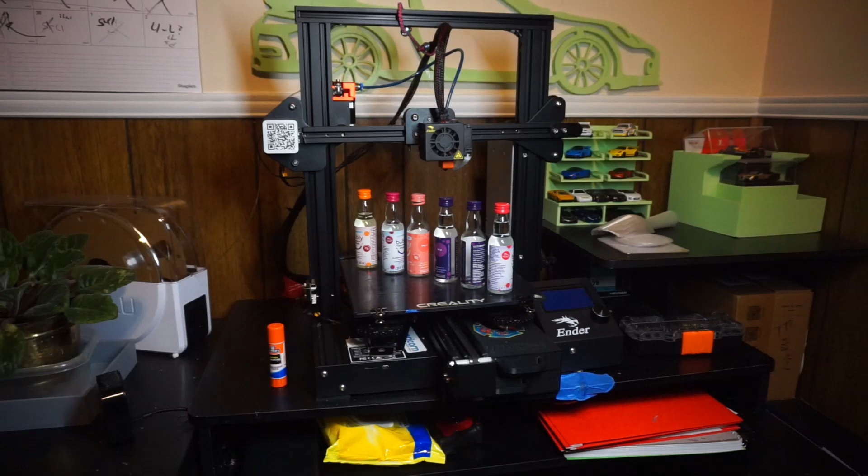Today I will be teaching you how to 3D print. I currently have these bubbly flavorings in my fridge and I'm afraid they'll leak. So I'm going to solve that problem with my 3D printer and I'm going to bring you along with me. I think they can go right here in my fridge.

It should be good. Now this is an Ender 3 Pro I got for Christmas. I have used filaments like PLA and PETG, and today I'm going to use PETG by a company named Overture. As you can see, it's transparent, so it has no color, it's just clear. And in order to keep the filament printing well and clear, we're going to use this filament dryer. Once turned on, it heats the filament up and allows it to release moisture.

While the filament is drying, let's draw up an idea. I want the bottle standing up in an arrangement sort of like this. Let's draw the first part. This will be the base, and the top will slide into the top of this base, so that's the side view on the left, and the top view on the right. As drawn here, I originally thought there would need to be indentations in the base, but later I discovered that wasn't actually necessary. And let's draw the second part too.

This part will sit above the base and will actually stop the bottles from falling over. The bottles will slide into this top part and sit on the base. I'm just going to draw the bottles in really quick just to kind of show what it would look like with the bottles in it. And now that we're done with the idea, let's get some measurements. Just for clarity, I'm going to draw the bottle out. That way I can put the measurements right next to it.

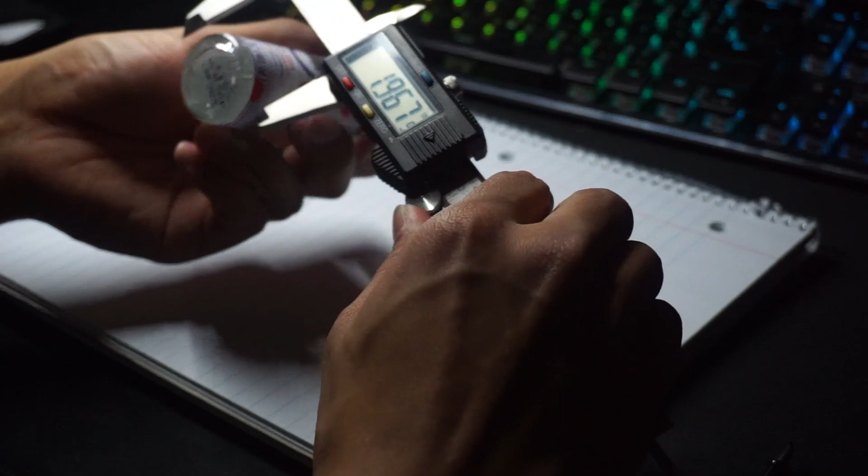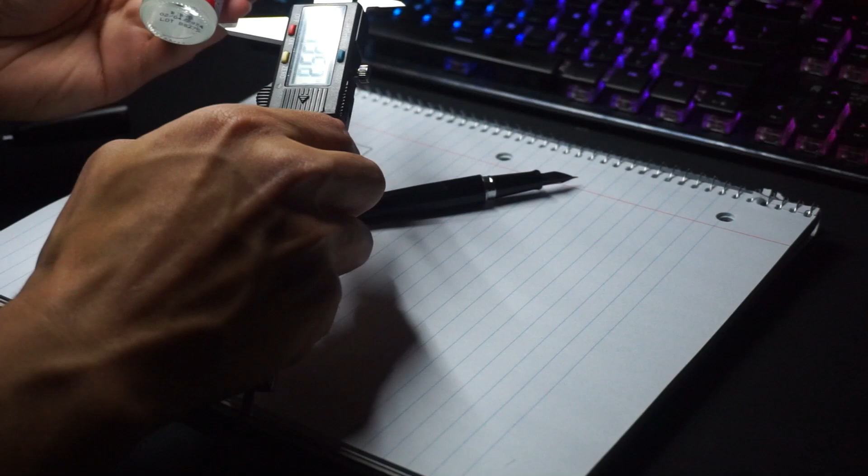First I'll measure the width of the bottle. This will help me determine how wide the holes need to be and how long the whole part needs to be. It will also help me determine how many bottles I can actually fit in the part. As we can see, I got 1.237 inches. Take that with a grain of salt. Next, I'm eyeing up how tall I want the part to be. 2 inches should be enough, hopefully. A tall part would take up too much plastic anyway.

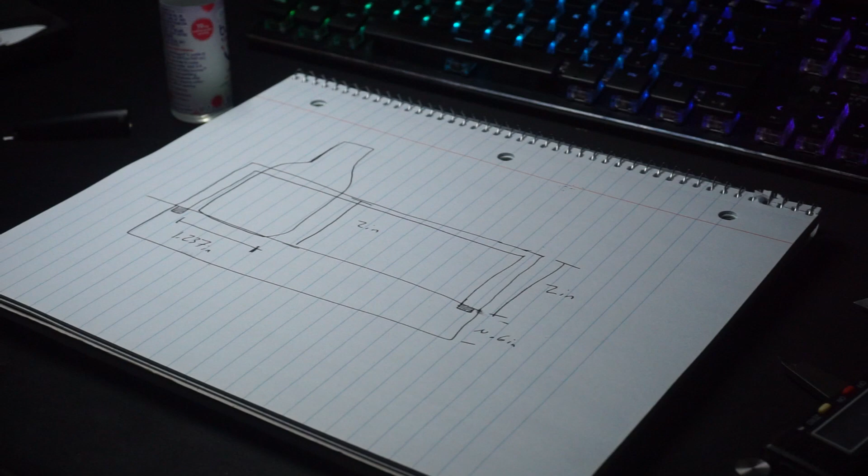Just gonna draw in the base and then draw up the top part. So the base will be one part, the top will be another that slides into the bottom. So here's a basic side view of the part with one bottle. The proportions are garbage. Here's a top and side view of the bottom part, and now we can determine the length of the part. Let's say 3 bottles should go in this part. And there's a 0.5 inch space between each bottle and a 0.5 inch space between the walls on each side of each end bottle. I will also draw a side and top view of the upper portion of this part, which will hold the bottles upright.

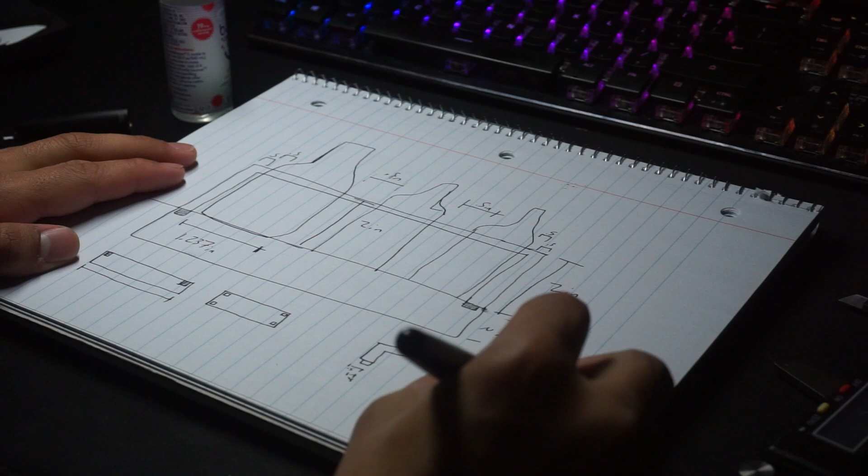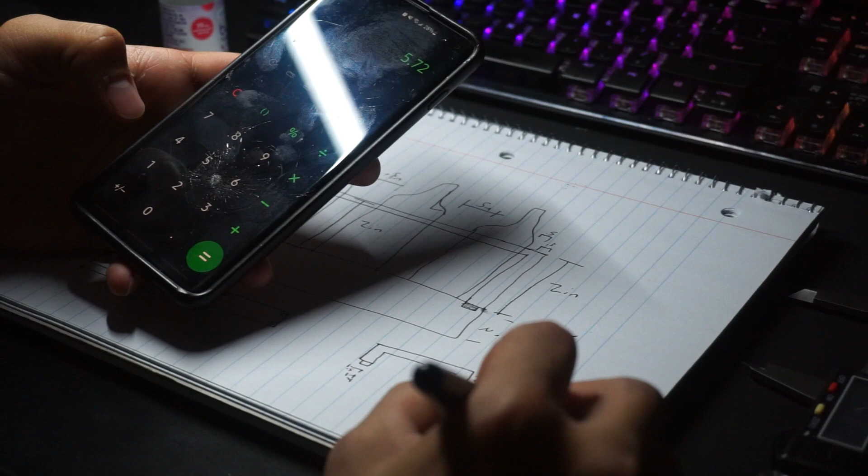After using the calculator on my phone to add up the space in between the bottles and the width of the bottle, we get 5.72 inches as the total length of the part, if it holds 3 bottles. Now that we have some measurements, I'll sign off the drawing and let's get to designing on the computer. I learned computer-aided design on Inventor, but I mostly use SolidWorks now. So after creating a new part and naming the file, I will get to designing.

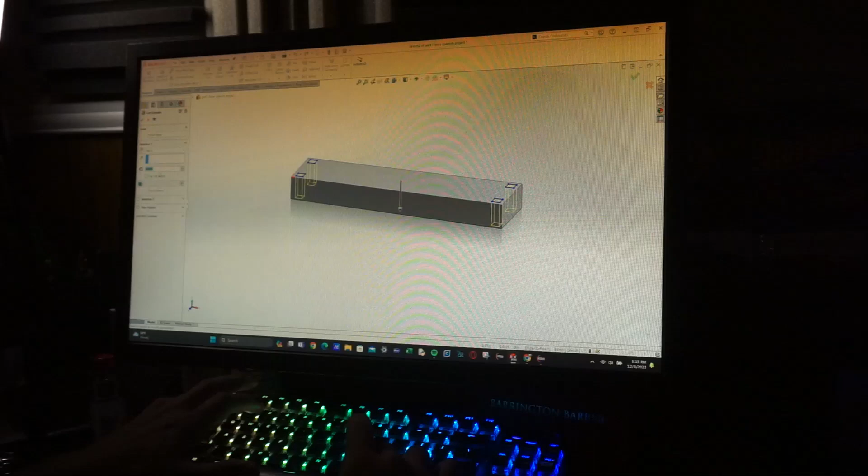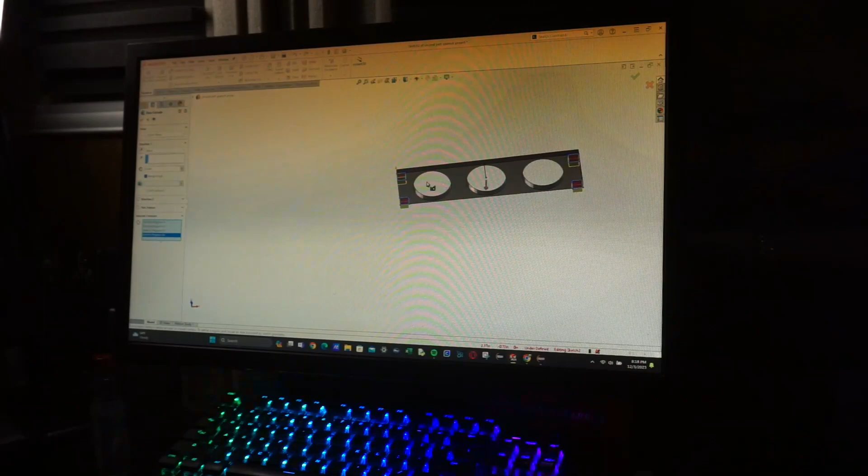This is the hardest part of the process, and depending on the complexity of the part, it could take a very long time. But this part is pretty easy, so it shouldn't take too long, but I will still speed it up. This is a pretty simple and uninteresting design, but it should get the job done well. After saving this part, I will make a new file and begin my second part. This part was a bit more complicated, but still nothing too hard. And now let's get to the exciting part, the 3D printing.

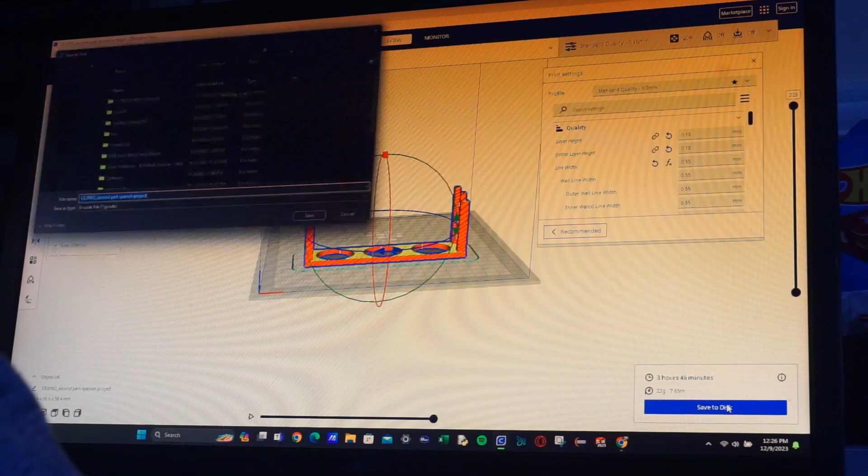The first thing we need to do is take this micro SD card out of the printer and plug it into the computer. Then we load up the slicer program. This will actually create instructions for the printer to use and will tell the printer where to actually draw or put the plastic. I use Cura. And this is a pretty cool system. See on the lower right it says 3 hours 46 minutes.

And once we put the part onto the SD card, we take it out of the computer and plug it into the 3D printer. Then we turn the printer on. And I use this little knob thing to navigate through the menus and find the part I want to print. And then we scroll to the right, click print, and we let the 3D printer do its thing.

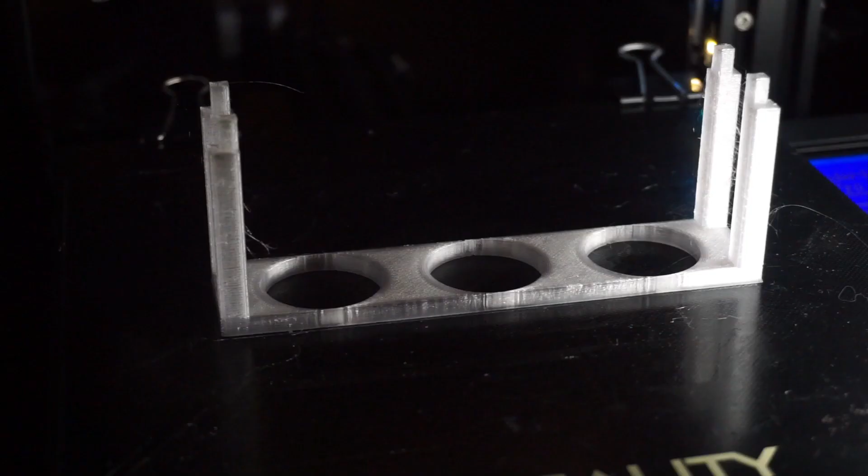Now the parts are done. So let's see if these fit. As you can see, this lower part has little holes in it, and this upper part has like tabs almost. So the tabs will slide right into the holes, and then they sit like that. Could add some glue in the future, and then we slip the bottles in. This definitely took more than one try, by the way, and the part is done.

Now I just need to put it in my fridge, make sure it fits. Looks awesome. That's 3D printing.